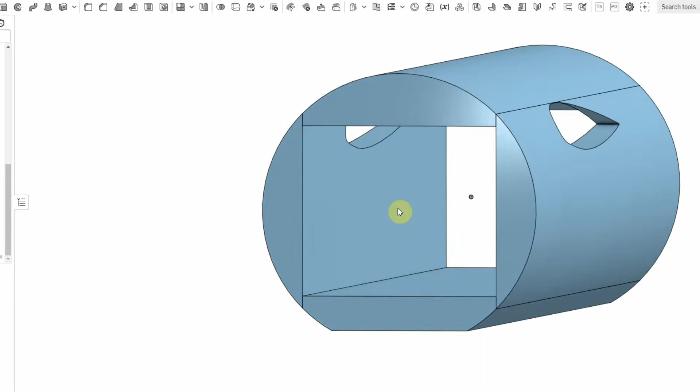The fuselage, pop this open. The fuselage is made of this hot wire cut EPP segment. So basically these little quarter moon segments, I cut 4 of them and glued them together around. And basically we have a 4-inch by 4-inch center volume. And then we've got the full round on the outside. And that's pretty much the fuselage construction.

It's EPP with white Gorilla Glue that was all taped and pinned. And then I've got 3 mil lam over it. No spars in the fuselage at all. And this construction technique, I've used it on a couple other big planes. Works really well. It yields a really rigid yet forgiving structure. Pretty light because there are no spars in it at all.

The wing construction is hot wire cut EPP as well, with 1 or 2 fiberglass spars, top and bottom, laminated. This is a NACA 23015 airfoil on the main wing. And the main wing tilts, so this is a tilt wing VTOL, and don't mind the mess of the wiring underneath. It's a prototype, so it's not going to be the neatest, and things change quickly, and I don't spend a lot of time making the prototypes look good because, honestly, they may not survive the first flight.

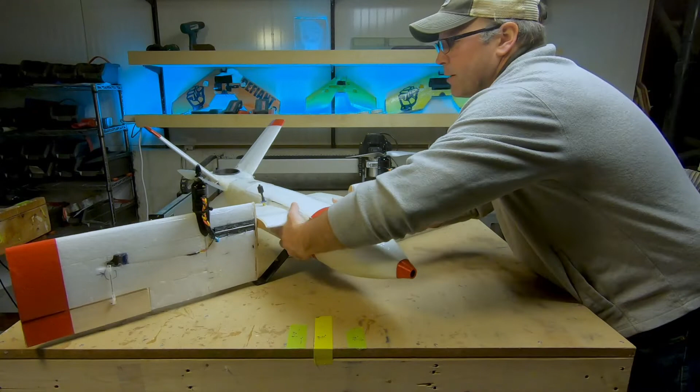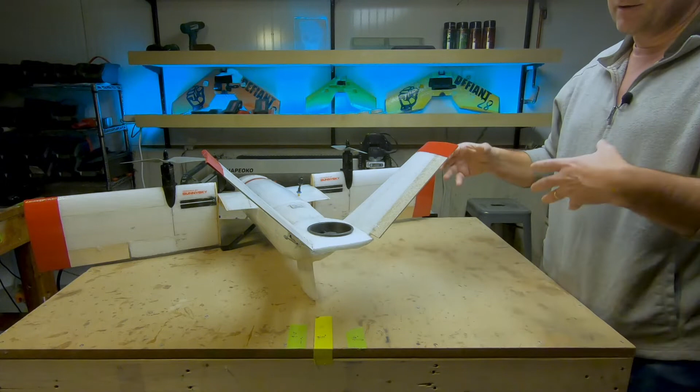Moving back, we'll take a look at the tail section. So, like I said, I wanted to minimize dead weight, or weight and components that only worked in one of the flight modes. The tail rotor is the one piece, aside from maybe the large servo, that really doesn't have a purpose in both flight regimes. The tail rotor is only for vertical flight, so what I wanted to do was minimize its size and its weight. And more importantly, I wanted to minimize its drag.

So the theme of this was minimizing drag during forward flight. So I didn't want the 4 quad motors hanging off the side, causing drag. So that's one reason I went the other way.

The reason I went with a tilt wing instead of a tilt rotor is that with the rotors tilting up in a tilt rotor design, half of your prop disc is pushing down on a flat wing, whereas if we tilt the whole wing, the rotors are much more efficient in vertical flight because they're just pushing that air across that airfoil, so we're getting a lot less losses there.

The downside of that is that with the wings down like this, we've got this huge sail, so hovering in the wind can be challenging. So right now I've been focusing on getting it into the air and getting it transitioned as quickly as possible. Still working out exactly how we want to hover it in the wind.

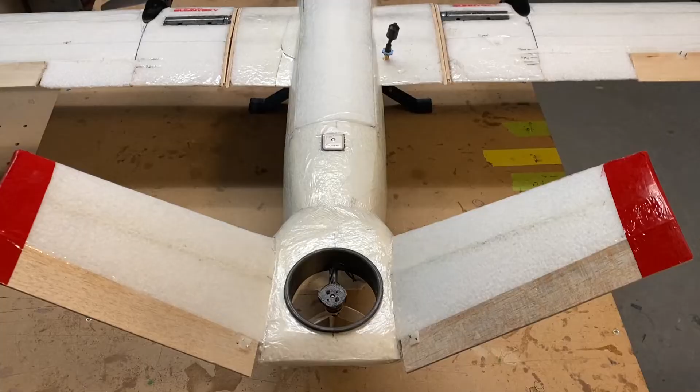But back to the tail here, I really wanted to minimize the effect of this tail rotor in forward flight. So what I did was I'm using a very small, light multi-rotor motor. It's a 1407, I think. 1306 or 1407. It's small, running a 3-inch prop on it. And I found that it is more than enough in the back.

It is mounted upside down right now. Early on, I had it mounted on top, and what I found was, as this motor is tilting side to side to vector the yaw, all of the thrust was hitting up against the inside of the duct here and being deflected down, so I wasn't getting as much yaw authority, and I was getting more pitch out of it than I wanted. And the simple solution was just turn it upside down, and that seemed to work quite well.

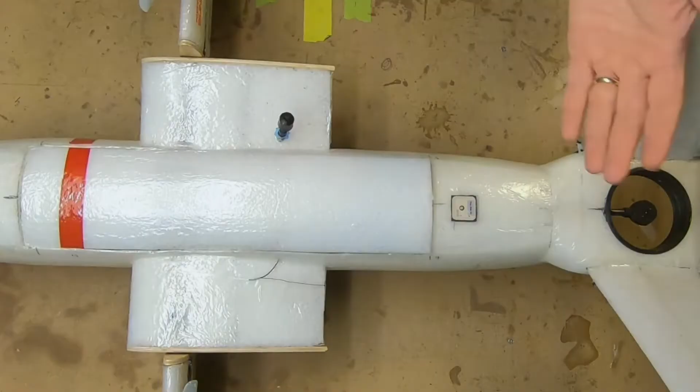Okay, so we've got this set up here so you can look down inside, and if I pull the bay cover here, you can see that it's just held on with a little lip here, and a couple of steel pieces just catching a couple of magnets here. Okay, so up front here, we have the Matek F765 wing board, and really liking this board. Jury's still out. I'm not loving the current sensor on it. It has been giving me a lot of problems, and I haven't been real happy with that. But the overall board is fantastic.

I have a remote USB connection here that I picked up from Ready Made RC, because constantly plugging into it, I actually ended up breaking the USB connector and had to solder a new one on. Coming back underneath all of this mess, the ESCs are down underneath the center here, and then their wires come up, run into this tube here.

So this is the pivot tube, and basically the way this works is, this is actually surplus from an old multi-rotor I had, a large 650 size multi-rotor. They are 16 millimeter carbon fiber tubes that come into this connection, which is actually just a motor mount, believe it or not. So then there are two tubes, and the reason I did this was that I could play with alignment for one, but also I could run these motor leads and servo leads inside the tubes and not have to worry about how to deal with them during the transitions. So they run inside the tubes and then are distributed to either the motor or the servo in the wing.

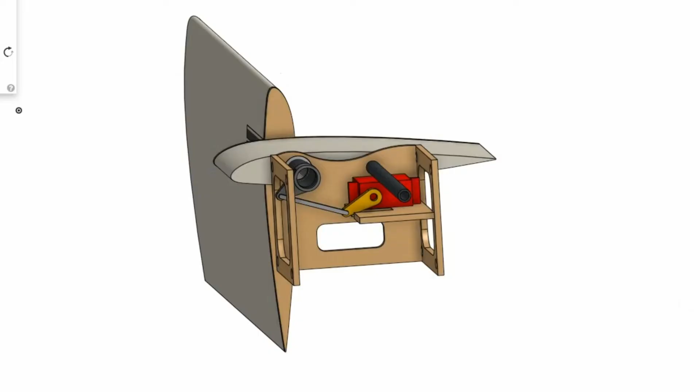What I have here is a large servo that is the tilt servo. And for this tilt servo, I made an aluminum mount that bolts to the bottom here. So as this servo moves, it tilts the wing. This servo here is actually a locking mechanism, so when this wing rotates up into forward flight, to minimize any flutter, this servo would just turn and push a pin into the wings to keep them from rotating and fluttering and vibrating.

I haven't tested this in flight yet, just because I'm nervous. I know it will lock, but I'm afraid if it's under too much pressure in flight and it won't unlock, I won't be able to rotate the wings back and things will get interesting.

Okay, so moving back, I have mounted here a Crossfire Nano receiver with the antenna here on the wing. Not optimal, but it's not going far enough range for it really to make a difference. On this side, I have an adjustable VTX. This is 25 to 600 or 800 milliwatts adjustable VTX. I think this is a Mach 3 VTX.

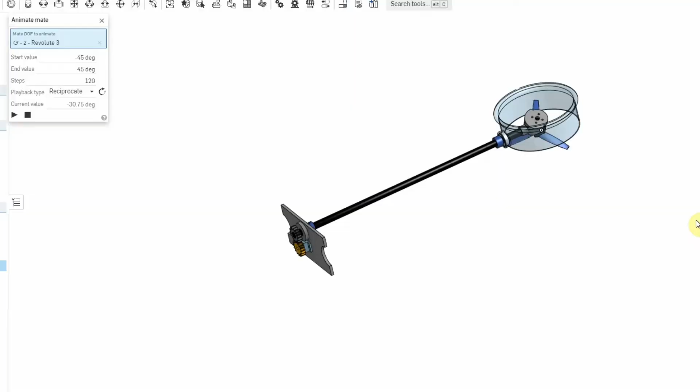Right here, this is interesting. These are 3D printed gears, and there is a servo here, and this is the tilt servo for the motor in the back. So basically the servos here transmit the twist up here to a carbon fiber shaft, which is actually just a carbon fiber arrow shaft that comes to the back here and tilts the motor. Again, we're riding on bearings that are mounted in 3D printed slots. Recesses are set up for the bearings in here, and the shaft just runs through those bearings.

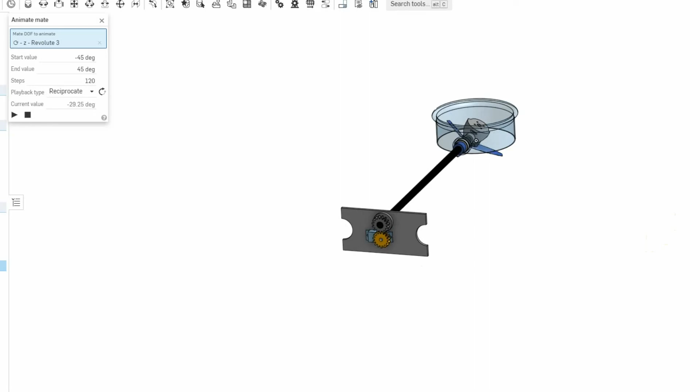The idea here was twofold, actually. One, I wanted to get the weight of this extra servo out of the tail. I wanted to move it as far forward as I could so that it wasn't having so much of a tail weight effect. The other reason too was I knew that once I got everything in here, it was going to be difficult to modify or repair if the servo went out. So by having it up here and not buried inside the wing, I have access to it. So it's much easier to replace this servo and these gears.

Honestly, there's just not a lot of stress on them. The gears are printed in nylon X, and I've been testing this and putting it through hell here for the last month or two, and they really don't see any wear on them. So pretty happy with the way that's been going.

GPS mounted up here. Tried to get it as far away from the other stuff, but part of the problem with this is, a lot of times I would mount things out in the wings, and then that just complicates the wiring getting them out here in the wings. So most of the electronics and the radio and everything were mounted in the fuselage, but again, this isn't the final product, and it's not a real long-range bird at this point, so it's not really giving me any problems.